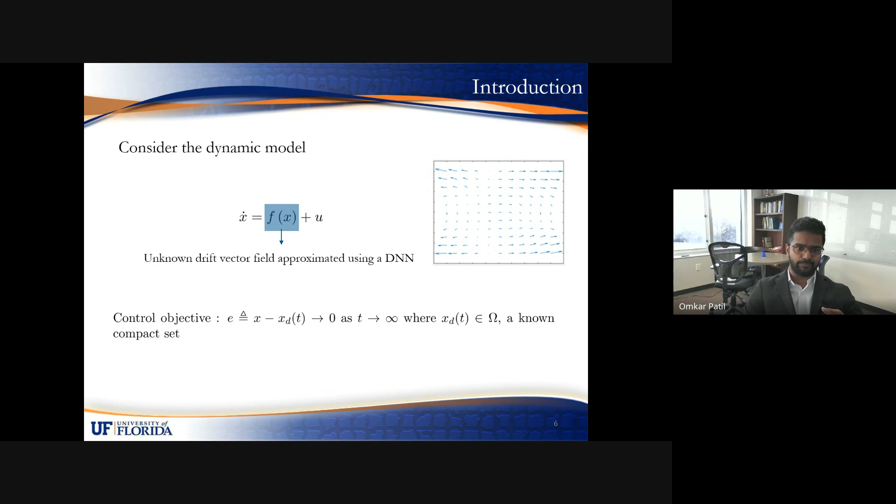Since f of x is unknown, the idea that we're going to explore here is we can model f of x using a deep neural network. We can leverage the universal function approximation property of deep neural networks to model this. So there are two approaches to do that. A popular one is using offline training.

That means you could collect batches of data based on prior experiments. You can collect trajectories from prior experiments, create data sets, do batch training, and you get a static model. That is the most popular paradigm, but it has its own drawbacks. One of them being it involves state derivative information, although that's not the major issue here.

The major issue is it is not able to adapt to changes in the dynamics, or changes in the environments. There could be real-time disturbances. So a static model has these limitations, and the approach that I talk about here is real-time adaptation, where we can update the weights of this deep neural network in real time, which gives you a dynamic model, in the sense the weights are changing in real time.

But if we are updating the weights in real time and also implementing that as a closed loop approach in the control input, then we have to ensure that the control and adaptation loops result in a closed loop dynamical system. So that also means that the update laws that you design for such a system have to guarantee stability of the entire closed loop system. So what I explore here is a Lyapunov-derived approach, where the update laws are derived from the following Lyapunov-based analysis if we substitute the update law that we derive.

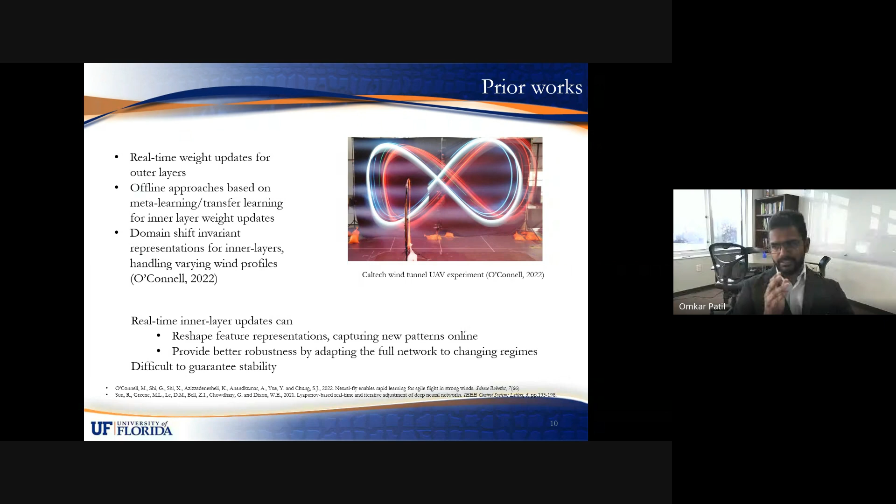But then the question is, how do we still update the inner layer weights? So that remained an open question. Although the contribution in these prior works was they developed domain shift invariant representations for the inner layers, meaning with this domain shift invariant approach, like a meta learning based approach, they are able to show robustness even with time varying wind profiles, and they did this experiment in a wind tunnel at Caltech. But doing real-time inner layer weight updates still remained an open question, which I address in my 2022 work published in Control Systems Letters.

So just briefly to summarize what I do, there is this deep neural network architecture with k number of layers. This is a fully connected DNN architecture, and based on that, I develop this control and adaptation law. So this is the control input, and the first 4 terms that show up are fairly standard in constructive nonlinear control.

But this last term here is the deep neural network based term with a theta hat estimate, and the theta hat estimate updates using this projection based adaptation law, where gamma is the learning rate matrix, this term represents the Jacobian of the deep neural network, and E is the tracking error. Then picking this candidate Lyapunov function, you can do stability analysis to show that the tracking error converges to 0.

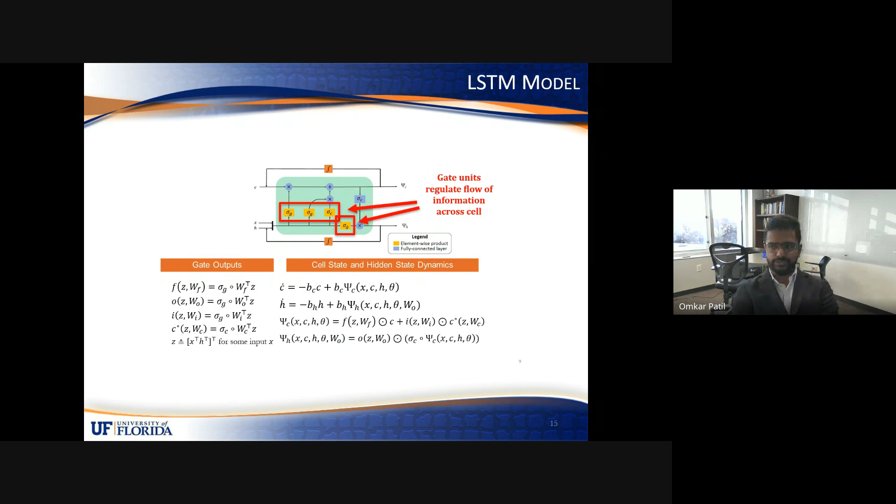Once we are at this point, we apply a similar approach to derive the Lyapunov-based update laws. There are a few terms in the Lyapunov analysis that can be problematic, and to counter those effects we use a robust high gain approach. But for terms that could be canceled using a Lyapunov-based adaptation law, we derive one to cancel those terms.

The next thing we explore is physics-informed neural networks. Physics-informed machine learning gets the best of both worlds, like classical modeling approaches versus data-driven approaches. Classical methods are reliable, but they require full model knowledge, and data-driven approaches don't need model knowledge, but we can combine them using a neural network, and that is something I explore.

But the way I do that is a non-standard way. Consider an Euler-Lagrange system: here's the inertia matrix, centripetal Coriolis, gravity, potential effects, and dissipation effects.

The way this approach works is every individual term here is modeled using a deep neural network, and this retains the relationship. This network is multiplied with the acceleration, and this network is multiplied with q dot, and so on and so forth.

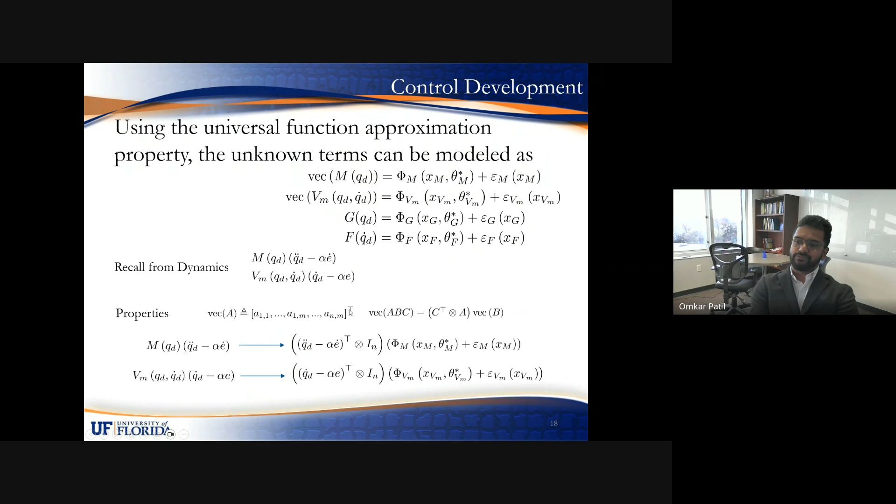The way this works is because M is a matrix and VM is a matrix, we apply vectorization operations here. When we go to the Lyapunov-based analysis, when we substitute the dynamics and go through the manipulations, we have these terms showing up which involve dependencies on M and VM. So again, we apply the property of vectorization and Kronecker product operations, and it gives us these terms. At this point, it becomes easier to develop a Lyapunov-derived adaptation law.

So the Lyapunov function in this case is not a single theta tilde parameter, but we have theta tilde for every component showing up. Based on this, we derive these Lyapunov-based adaptation laws. There is the theta hat dot m vector, this adaptation law for the inertia matrix, and this is the adaptation law for the centripetal Coriolis, and so on and so forth.

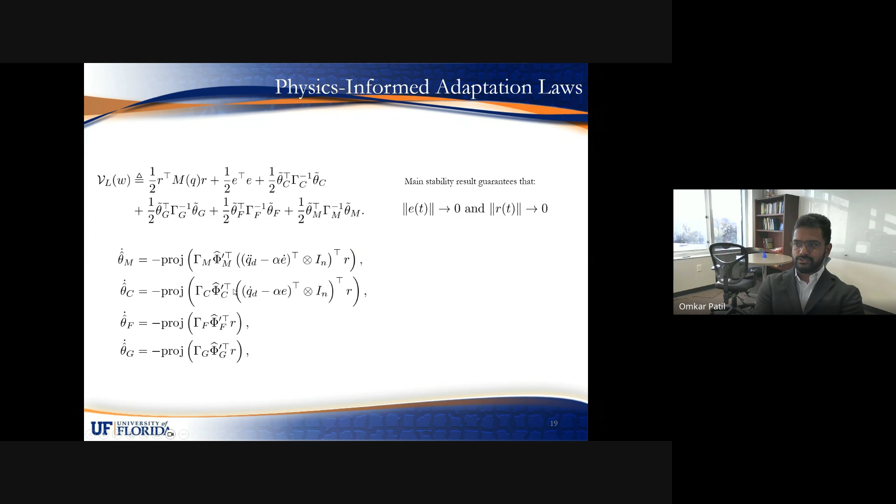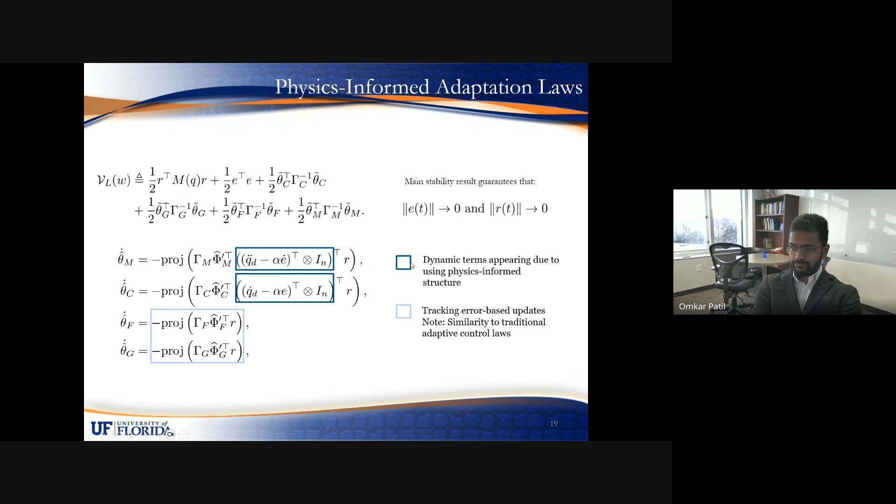From here, we can guarantee that E goes to 0, and the filtered tracking error R also goes to 0 as T goes to infinity. So that was physics-informed learning.

But in the slides so far that I have discussed, we were still focused on tracking error convergence - that was the main objective being solved. But we usually don't care just about trajectory tracking, that we are able to track a reference trajectory. The goal of adaptive control in general, and same thing applies for learning here, is that it's also important whether we have a parameter convergence result.

So the topic I explored here is being able to do simultaneous online system ID and control, so being able to achieve parameter convergence as well would be interesting.

To this end, I developed this composite least squares adaptation law involving a prediction error term. When I explored this approach, I initially was trying Slotine's classical composite adaptation approach, and was going to try to see if it would directly extend for deep neural networks, especially the inner layers. But there are challenges when I tried doing that.

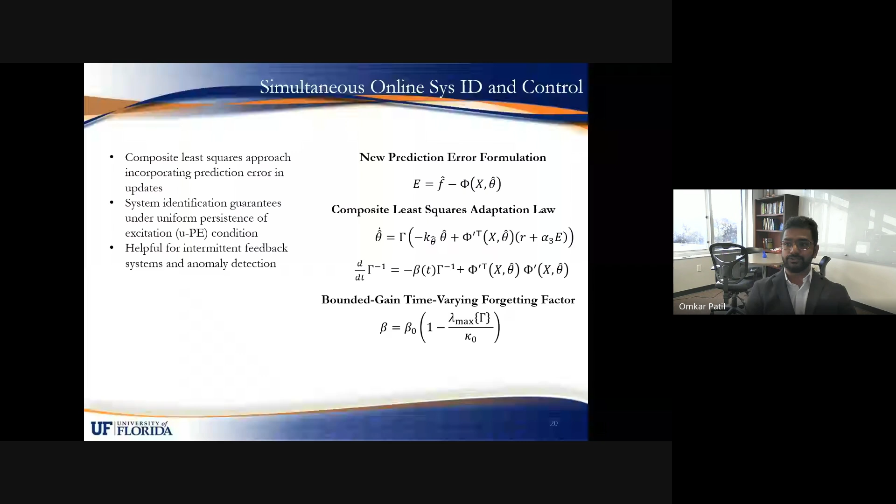But the interesting thing about this mechanism is it is able to show system identification, like parameter convergence to a neighborhood of the origin under the uniform persistence of excitation conditions. And these guarantees are very useful.

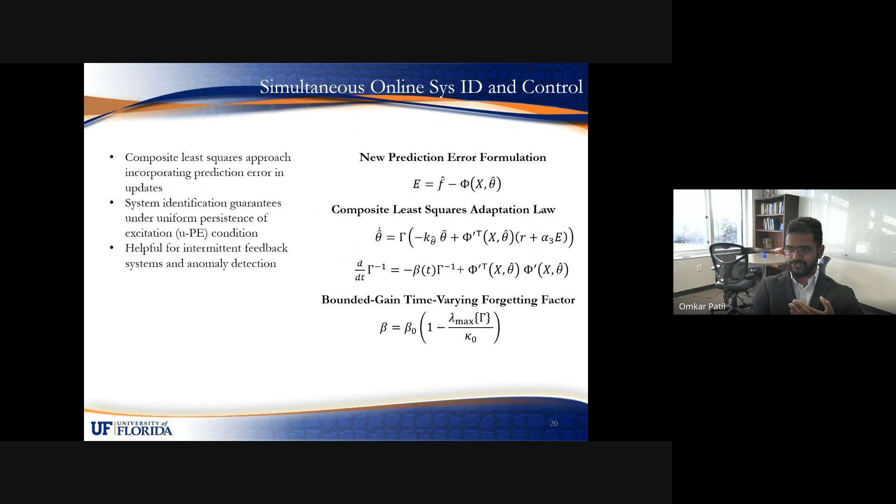I mean, being able to guarantee system identification, what does it mean in terms of the outcome? So system ID would allow for using the learned model for intermittent feedback systems and for anomaly detection. And that is the key application of this result that I'll talk about soon.

But before I get into that, I'll talk about intermittent feedback. What is intermittent feedback? Intermittent feedback systems are systems that have intermittent loss of feedback, and that could happen due to various reasons. One of them could be robots operating in limited camera field of view. There could be GPS denied regions or occlusion zones coming from many sources. So that's an interesting problem to talk about.

And so when you have intermittent loss of feedback, you essentially end up with a switched system. I don't think I need to give a switched systems background to a Syscon audience, but overall the approach here is, because switched systems can become unstable even if every subsystem is stable, we have to be careful with this.

But what I do here is I consider the feedback denied mode as an unstable system. So the system itself is treated as an unstable system. For example, if we lose feedback here, the red part is when you have loss of feedback. And in that case, you consider the worst case blow up time and treat it as an unstable system.

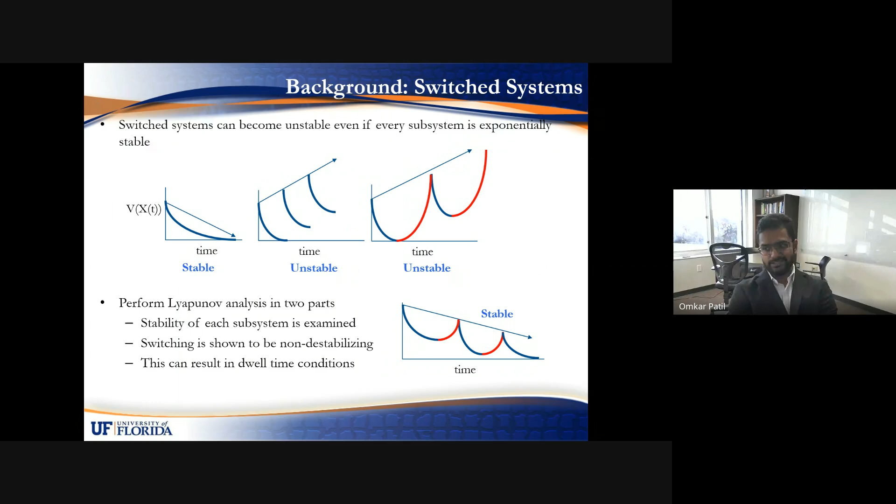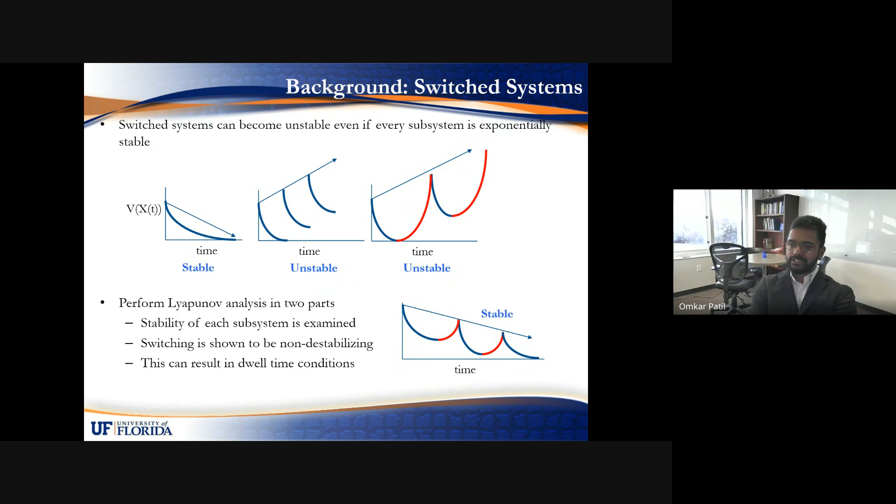And then that gives you dwell time conditions. As a result of multiple switchings here, like loss and gain of feedback, you want the overall trajectory, like the Lyapunov function, to be going down here. So that's the idea that we apply. And in the paper, I derive these dwell time conditions explicitly.

Then I applied the composite adaptation law to an unmanned underwater vehicle here. So you look at this simulation results. The gray patches are when there was loss of feedback. And as you can see from these plots, look at the brown line.

The composite adaptation law was able to identify the system dynamics. Its performance was good in the sense that, even with a loss of feedback, it is still able to predict. It is implemented open loop.

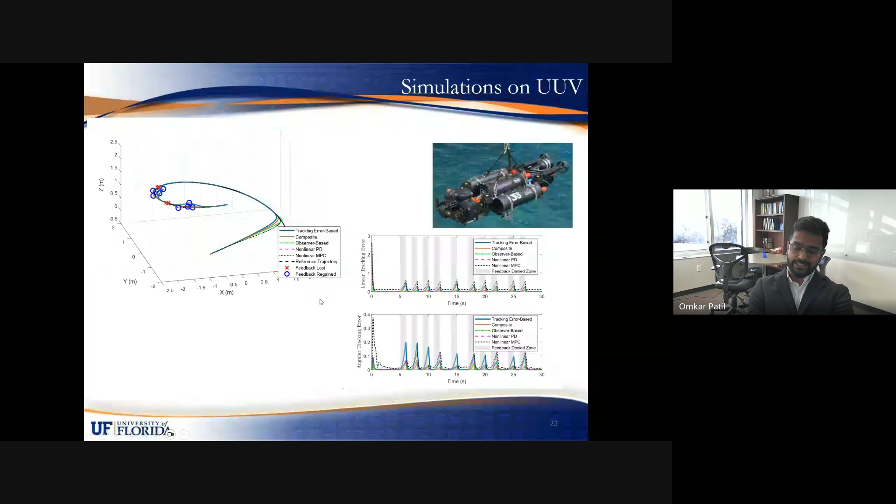This is the model obtained by the composite adaptation law when there is a loss of feedback. As you can see, the composite approach is still able to keep the tracking errors pretty low despite the loss of feedback. If you look at the other baselines here, they start blowing up at a higher rate. So that is a key advantage of the composite adaptation law that I developed.

So I talked about tracking and system ID so far, but another important goal in control theory is ensuring constraints, or state constraints, like being able to give safety certificates, like forward invariance results. Control barrier functions are a powerful tool to achieve that, and CBFs ensure safety by translating constraints on the state to constraints on the control input.

This means that safe control inputs satisfy this inequality, and these usually go as a constrained quadratic program. But the thing with this inequality is it depends on f of x, and you can implement this as a constraint only if f is known. But what if f is unknown, especially in the context we are talking about, like for uncertain systems?

So the philosophy here basically is you could replace f with its estimate f hat. But then if we do this, we also need to account for the error in the estimates, otherwise the approach would be invalid. So if we have an f tilde term here, this term is still unknown. So the question is, how do we construct a new constraint to also account for the error in the estimate?

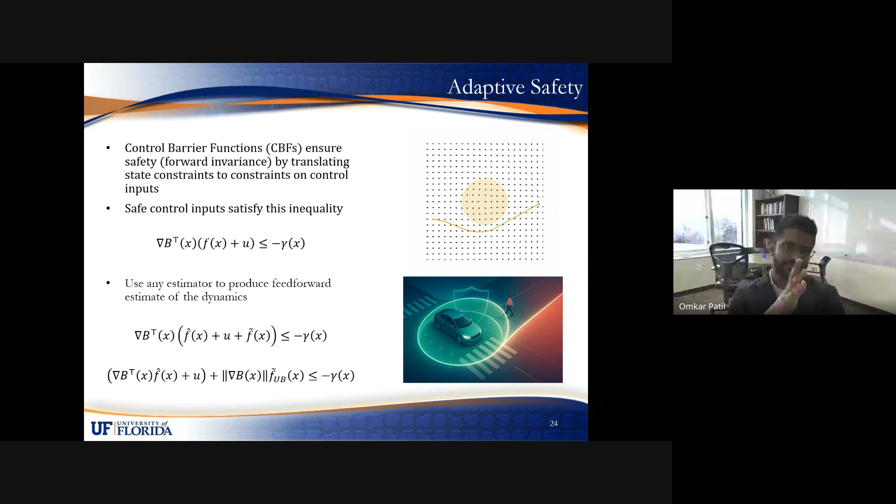And on top of that, in intermittent feedback scenarios that I talked about, I don't think the robust control approach would be able to do that, because when you have complete loss of feedback, you cannot really rely on the state feedback, the high gains. When you have loss of feedback, everything is basically open loop, and then you need a good model to be able to make predictions. If that answers your question. Okay, fine. Go ahead.

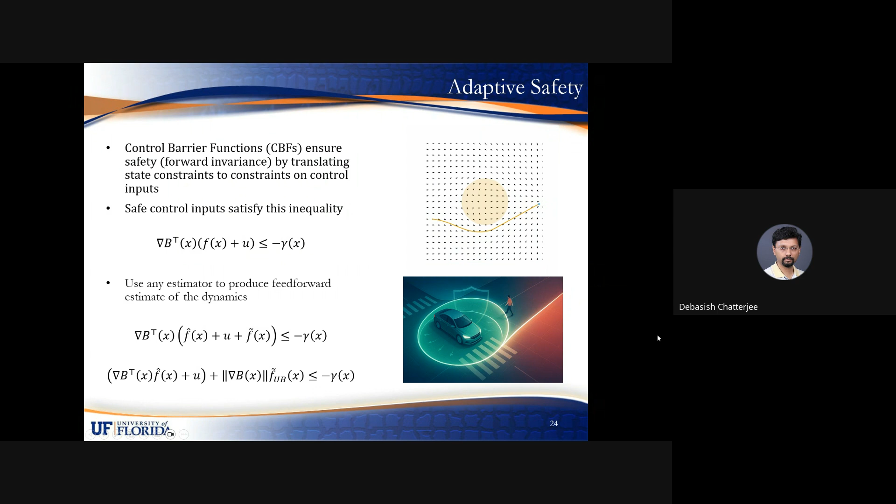That leads to a slightly different question. In your work, you are modeling the error as something small, is that correct? You have a baseline model that has a neural network which accounts for deviations from that baseline model. And of course, that neural network is going to have some errors, and the errors are small, hopefully in the uniform norm. Is that right? Yeah. So robust control deals with small errors. So why not use the robust control paradigm for your work instead?

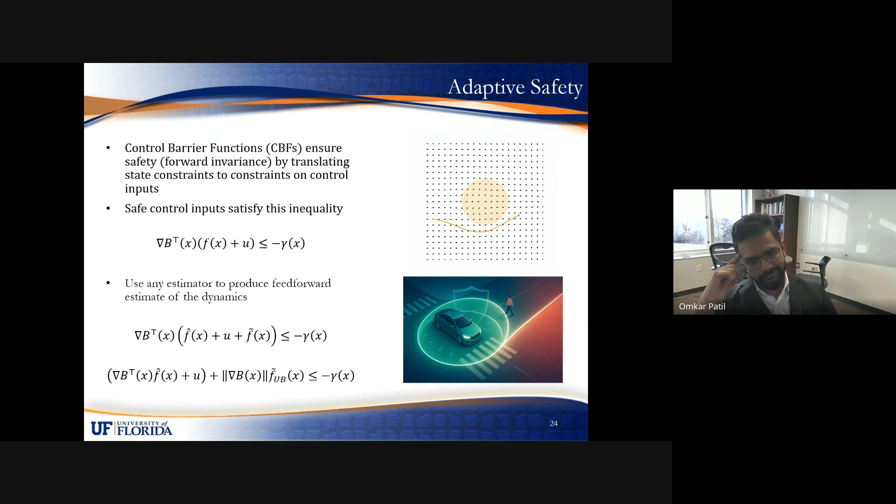So wait, are you talking about an offline network? You are designing things online. You are actually tuning the weights online, am I correct? Yeah. Right. Yes, go on.

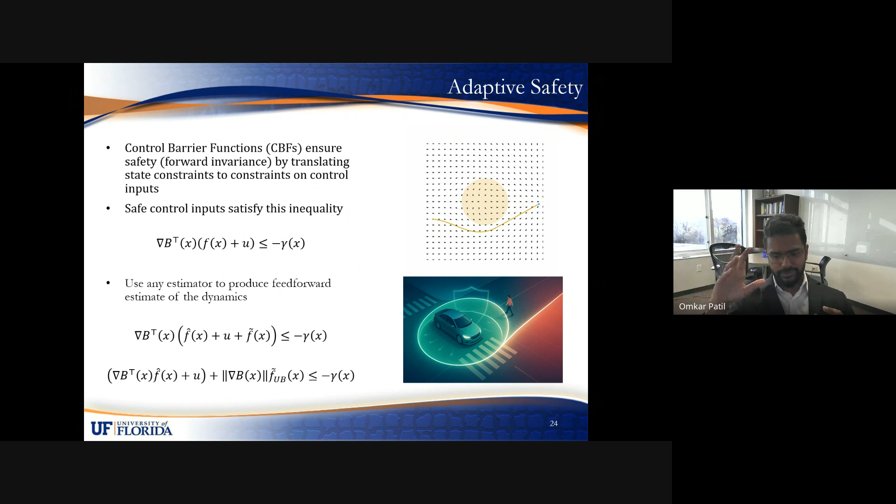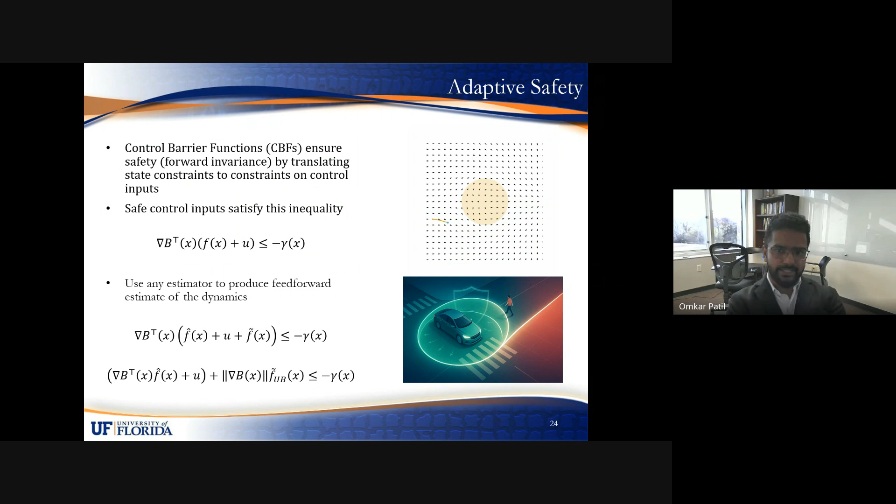So the approach I have is you could compensate for a large part of the uncertainty. The adaptive approach is compensating for a large part of the uncertainty, by canceling cross terms and so on, or where you are able to learn and compensate for the disturbance, but there is still some residual error, right? Even the best neural network architecture cannot perfectly model. So for those remaining small terms, there is a robust high gain term that I use. Yes, I agree.

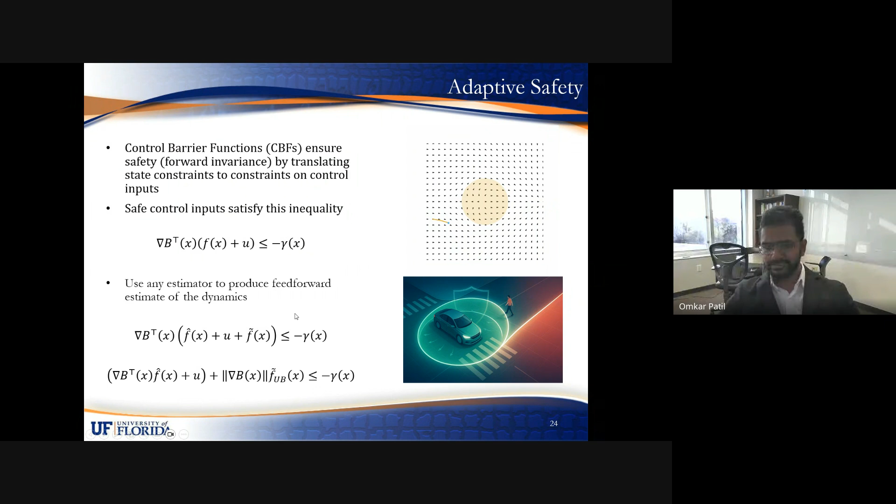Sure, go ahead. And I can take more questions. I just have a few more slides. Omkar, I was going to request, can you finish with your slides in the next 2-3 minutes and then maybe a few questions? Sure. You're right. So okay.

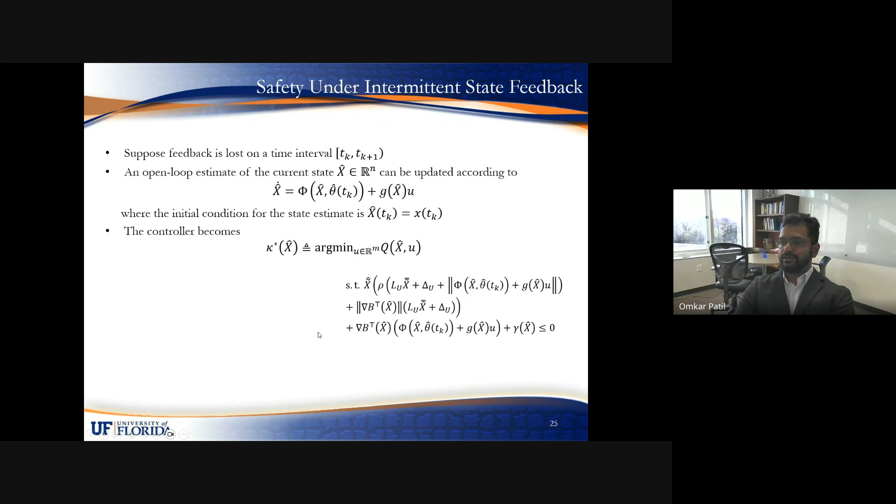So talking about safety under intermittent feedback. Similarly to the talk about Lyapunov functions, we can also have safety under intermittent state feedback, but we have to derive dwell time conditions in an analogous way. You can make open loop estimates based on the similar approach that I talked about earlier. And when you have loss of feedback, this is the quadratic program that you have to solve. And we also did a simulation study for safety under intermittent feedback.

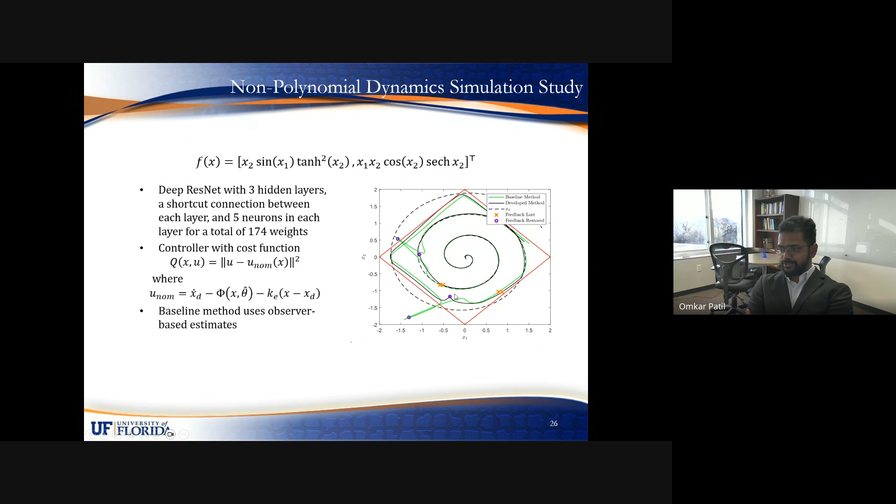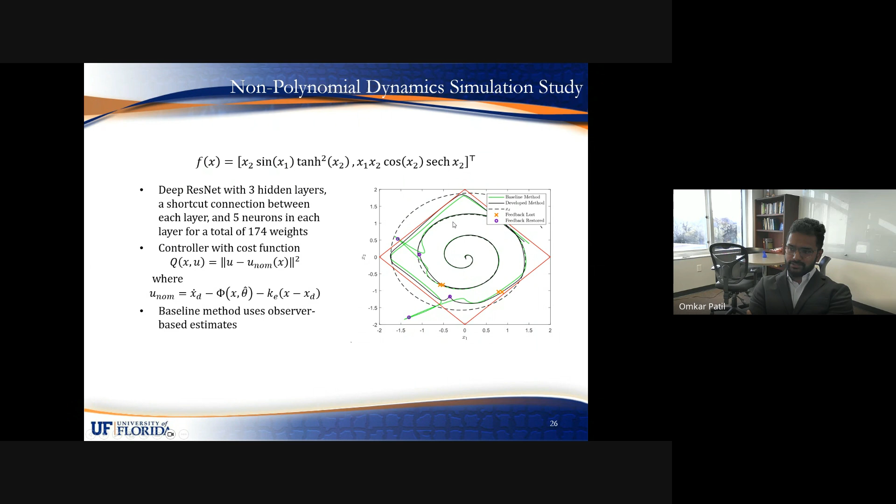You can look at this plot where X marks the time instances where feedback was lost, and here the feedback was regained. You compare with the baseline, which is based on a disturbance observer. As you can see, the baseline method actually violates the safety condition. If the red thing here were a wall, it would crash right into the wall. But the developed method is able to ensure safety, and still obeys the constraint despite loss of feedback. Another interesting thing about control barrier functions is they could be extended to signal temporal logic.

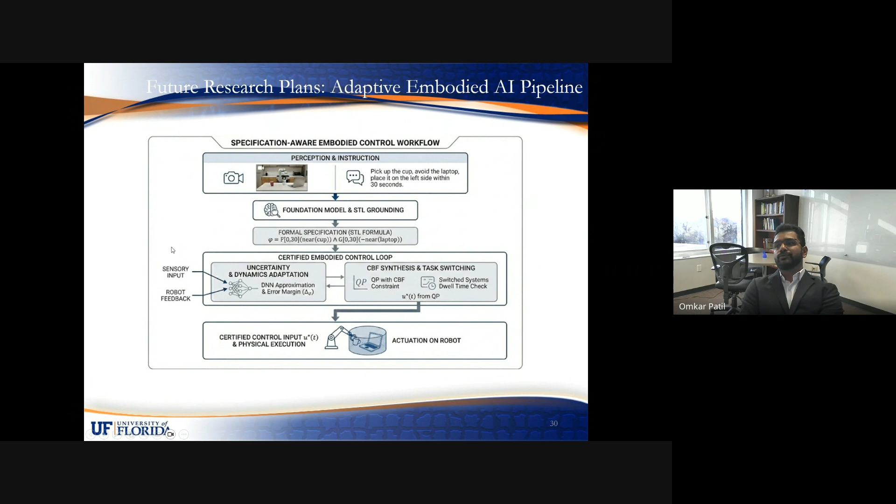And so let me talk about future research plans in a minute. One of the future research plans that I thought about recently was, you could use foundation models to complete this loop. So I talked about temporal logic, which is already able to integrate well within my Lyapunov-based deep learning approach. And now you could use foundation models to specify the STL tasks based on vision language models. And if we close the loop, it gives you a nice pipeline for adaptive embodied AI.

And another topic that I'm interested in is symbolic discovery of control methods. To give you a brief background, recently physicists have been able to discover new laws of physics, or replicate existing laws of physics, just based on data. Those are symbolic learning approaches that are very popular, with names like AI Feynman and AI Aristotle. You can look at these papers. One of the common methods to do that is distilling a black box model into a symbolic model. And that's a very interesting area of research.

And what I'm interested in exploring is, can this approach be taken further to discover new control laws? What would be interesting for me is, for example, if AI is able to rediscover a method like backstepping, which needed clever insight. So that would be really interesting. And then the next step would be being able to discover new control methods, like AI acting as a co-theorist. So that's an interesting idea.

And another research plan that I'm interested in is compositionality in dynamics and control, especially using category theoretic methods for dynamics and control. Category theory gives you a high-level mathematical language for describing various types of systems. You could have dynamics, feedback, and learning across various domains. So you get abstractions and compositionality. That's the key benefit of using category theory in modeling and control.

And I'll talk briefly about my teaching philosophy. One of the recent points of discussion is responsible use of AI and LLMs. I'm not against using AI in general. I mean, students should understand the fundamentals, so that is important. For that part, you do need classroom exams and things, or you could use vivas. But I also want to integrate AI in the teaching methodology, and want to teach students how to use AI responsibly, because they are going to use it anyway.

And another thing is, as a research scientist here and as a postdoc, I mentored many graduate and undergraduate students in my group, so I have the experience to mentor in a similar manner. Another thing about my teaching methodology is the use of interactive open source teaching tools. You can actually check my website. I have some open interactive tutorials here. These are web-based tutorials, and there's a tutorial on physics-informed neural networks. There is a tutorial on CBFs and SLAM and multi-agent systems. I also explore some of my research topics in those, but they're mainly teaching tutorials.